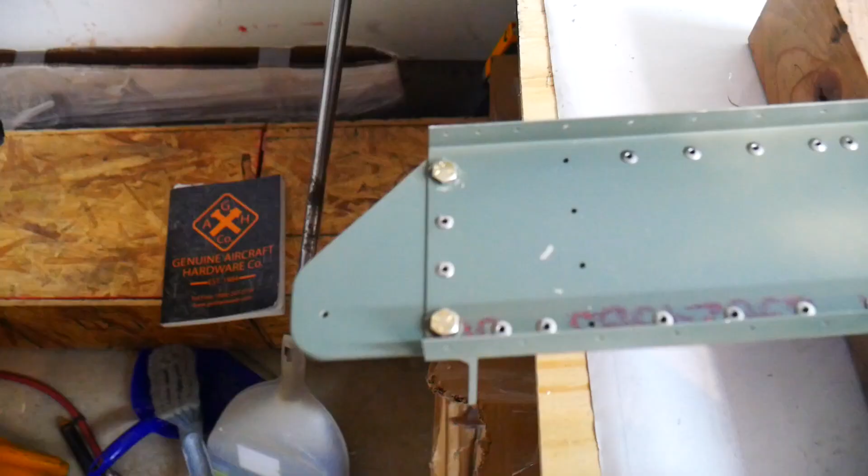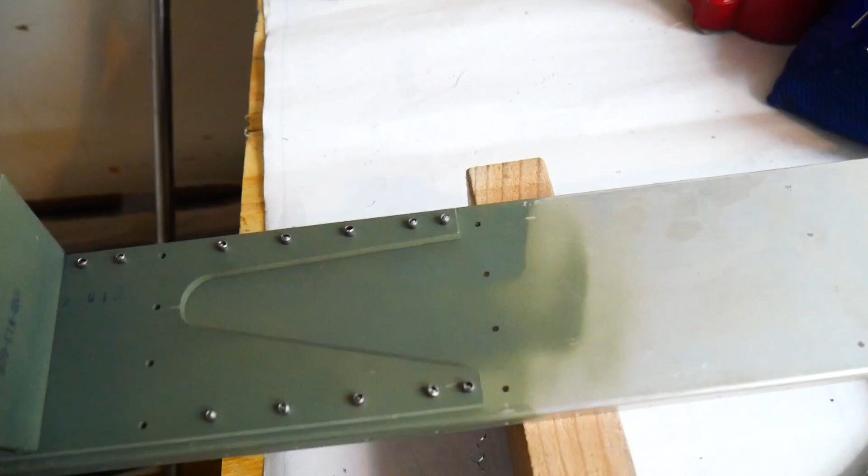I've gone ahead and already built one of these. There's the main spar bar here, a doubler on the back side, and over here another doubler with this little cutout, and then a machined angle bar here.

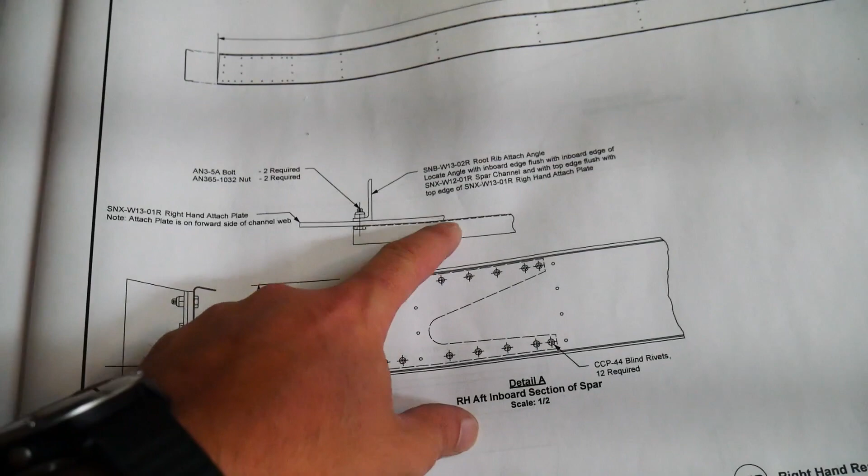You can see we have the plans here for both the left and the right. I built the right one first. There is a slight difference between the two. If you look here at the right one, this attach plate right down here actually goes right on top of the spar, and then it also has this aluminum angle extrusion here.

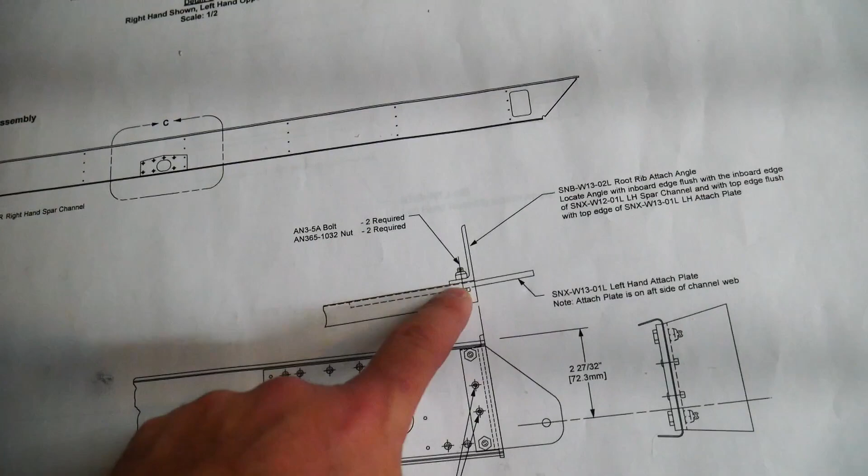It's been machined, and that sits on top of that. But if we look down here on the left side, the attach plate actually goes under, on the inside of the spar, and the angle extrusion actually goes on the outside, and it's also flipped around the opposite direction. So on the end of this one, the flat side of this extrusion lines up with the end here, but up here, here's the end of the extrusion, the end of the spar, and the flat end does not line up with that.

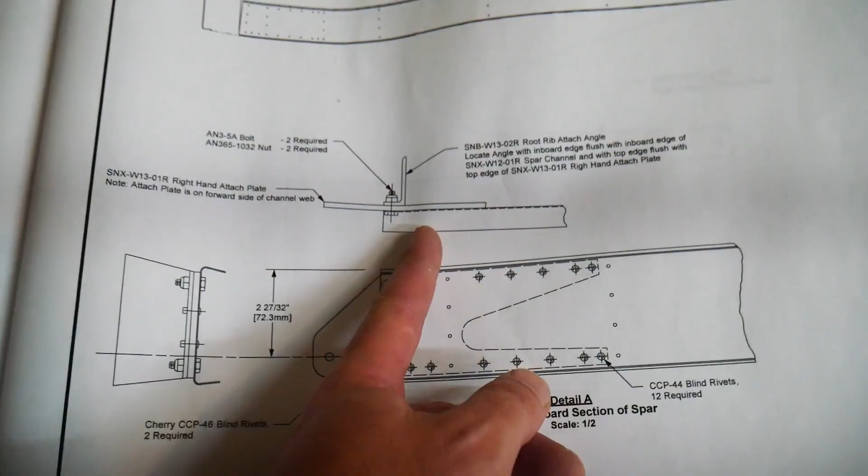There are some very small pilot holes that Sonex has drilled. They're just teeny tiny, you can barely see them. If you're not looking for them, you might miss them.

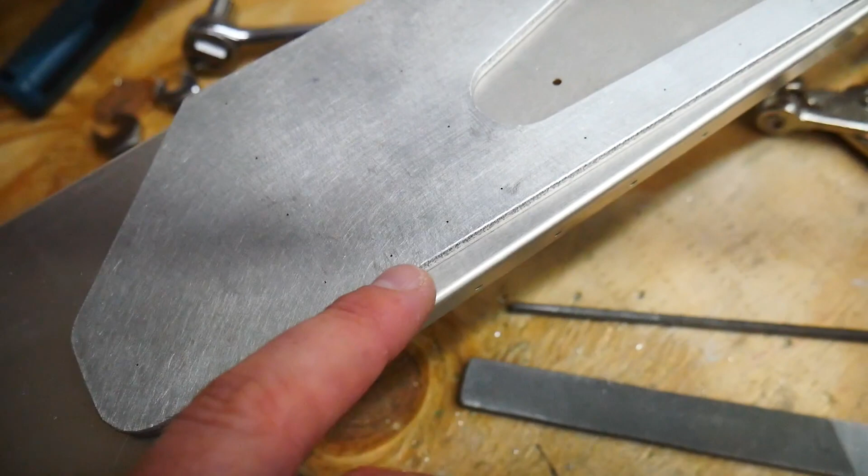I'm going to go ahead and put this on the drill press and drill these up to a size 40 drill bit, which is about a 3/32 inch hole essentially. That'll be just right for putting clecos into place to hold this all together.

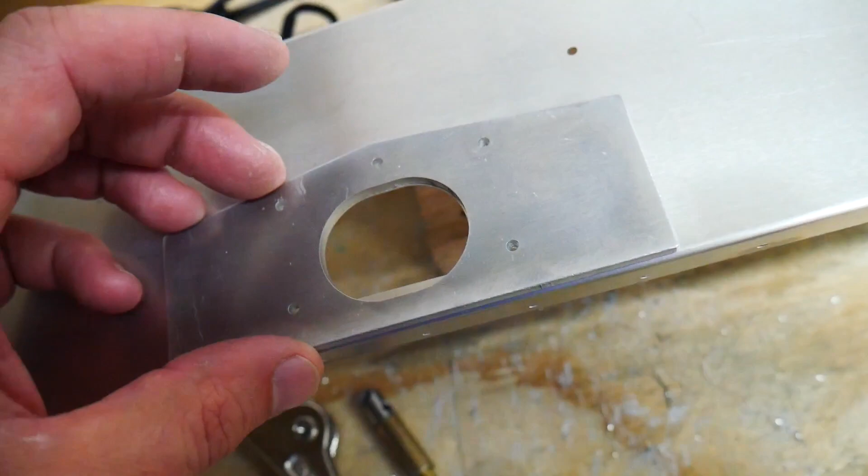Eventually I'm going to be drilling this out. You've got to get this lined up properly, but it'll be lined up and sit on top of this. So these four little holes, if you can see them here, they'll get drilled out, and then this will fit over the top of that, and we'll drill those holes out the rest of the way once we have it all lined up. This one over here basically just sits right over the top of these holes in here, and it just clecos into place, and then it's really simple to hook this one up.

We do have to drill out a couple of additional holes that aren't in the plate, in the doubler plate here.

But anyway, simple. So what I found works well with these attach plates, with these tiny little holes, is just to put it down on the drill press and very lightly introduce the drill bit to it. As long as it's really close, I don't hold this in place very tight. I just let the drill bit kind of center itself over the hole, and I give it the tiniest little tug on it just to make sure that it's lined up perfectly in the center before I drill all the way through. That seemed to work pretty well with the other one.

If I got to the point where I drilled in, I only had like one hole, I think, that didn't drill in perfectly in the center. So what I ended up doing is just flipping it over and drilling it from the other side instead, and it worked fine that way. Just, you gotta be gentle and go slow with it.

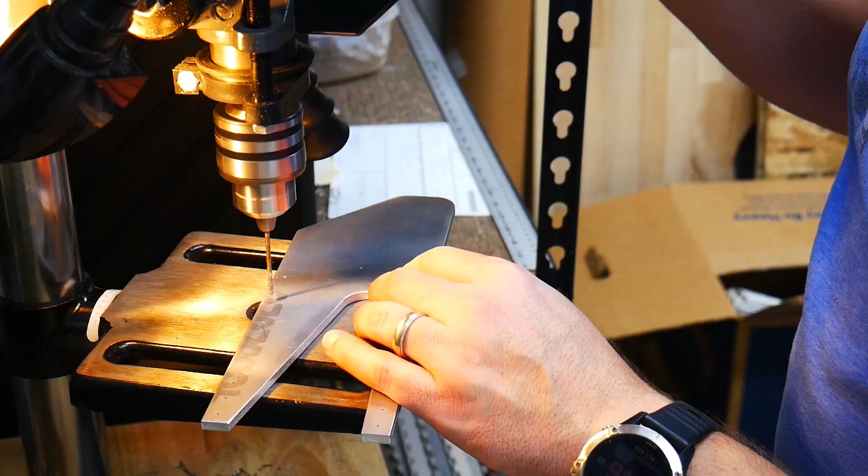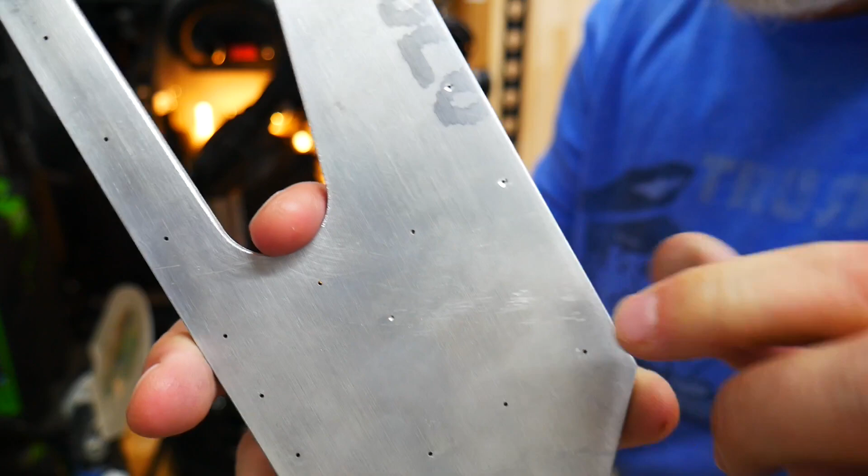Alright, we'll take a closer look here. You can see where this is one where I have not drilled yet, and this is one where I have. It's important to make sure that your hole is drilled exactly in the center, or at least the pilot hole is in the middle of your drilled area here. You basically just have to let it kind of wiggle around a little bit. Don't hold it in place or you're going to end up moving it. If you just let it kind of wander itself around a little bit, it'll find the center and it'll go down, as long as you get the point of the drill bit in there.

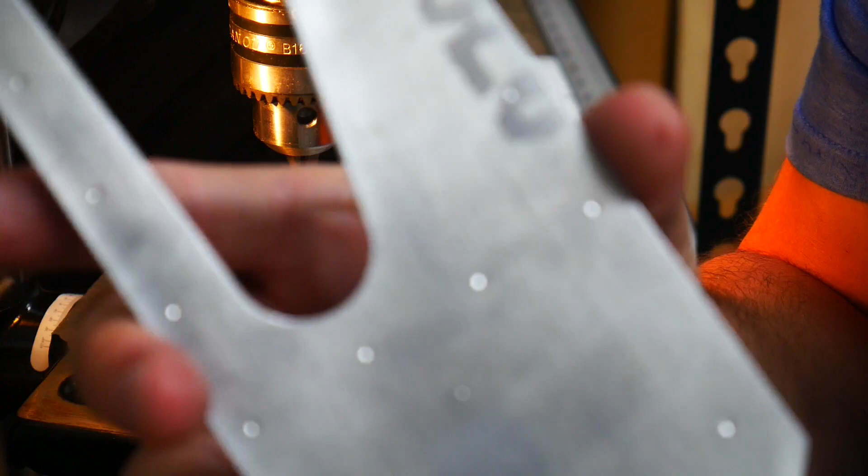Alright, so I've got all of these pilot holes just started, and then I'm just going to go ahead and drill through the rest of the way. You can make sure I use a little bit of cutting oil here, just to make sure that it keeps my drill bit from getting too dull.

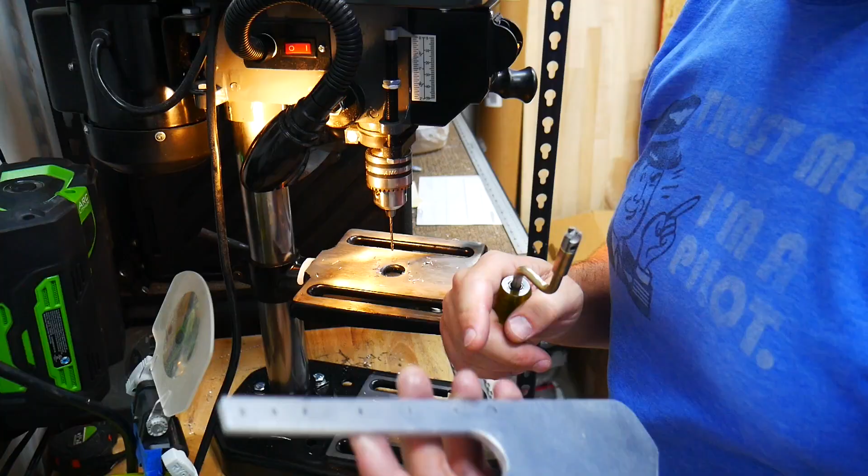Then just to make sure that the plate lays flat on the bed of our drill press here, I'm just going to go through and lightly deburr this. I don't need to take much off, just enough that it sits flat and doesn't make a crooked hole.

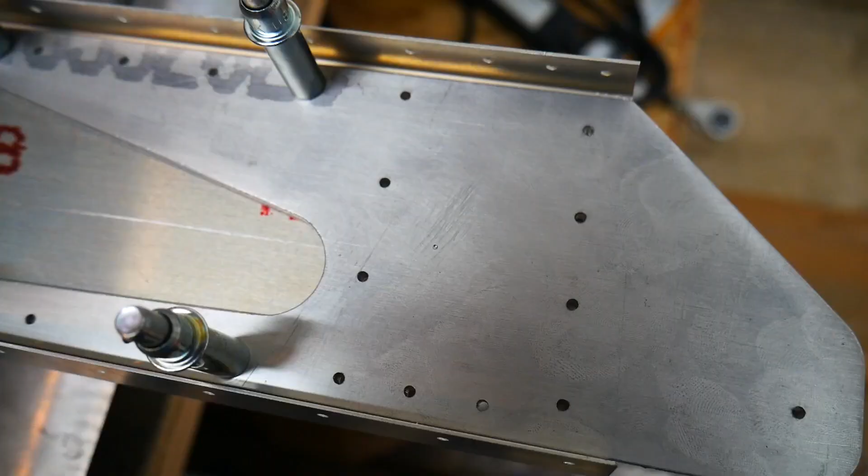So in my opinion, this is one of the most beautiful parts of the Sonex kit. These holes that I've drilled line up so exactly with the pre-drilled holes in the spar here. Every one of them lines up perfectly. It turned out so nice.

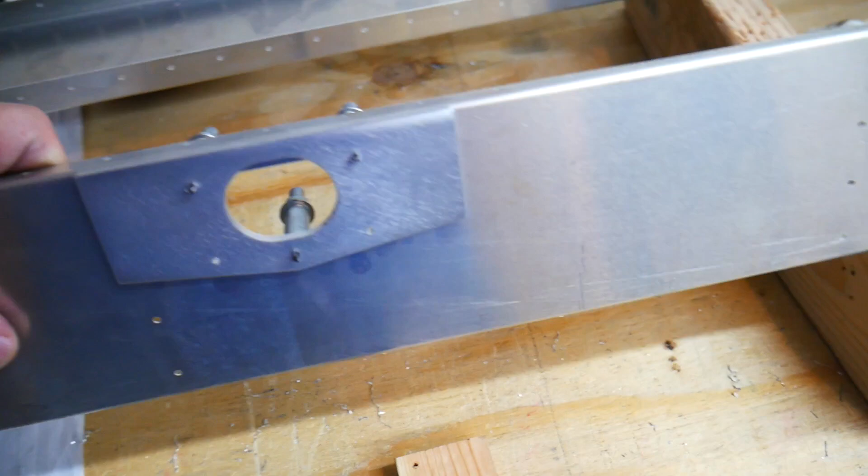I've also added this doubler to the other end of this, to strengthen up this hole here.

You'll notice that there's some holes here that haven't been drilled into the main plate. I'll go ahead and drill those out according to the directions here.

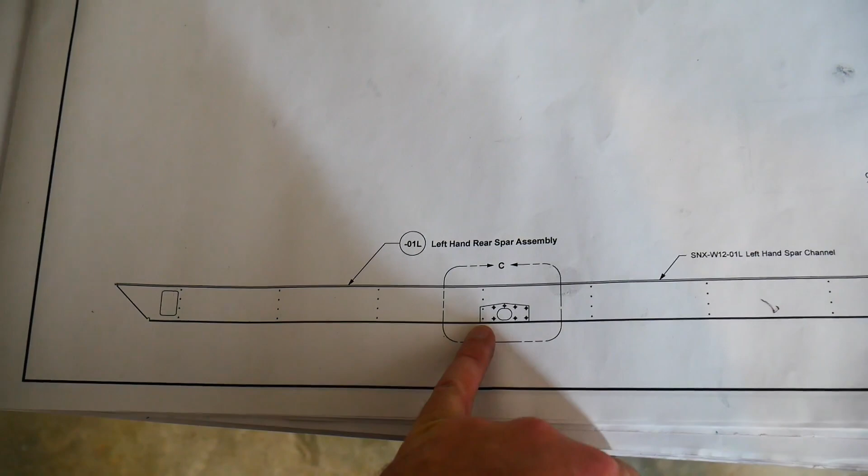You'll notice that there's a couple holes here that are drilled, but we don't put any of the rivets into. It's just these 7 that are right here that get the rivets in them. These 2 don't, but I do drill them out anyway.

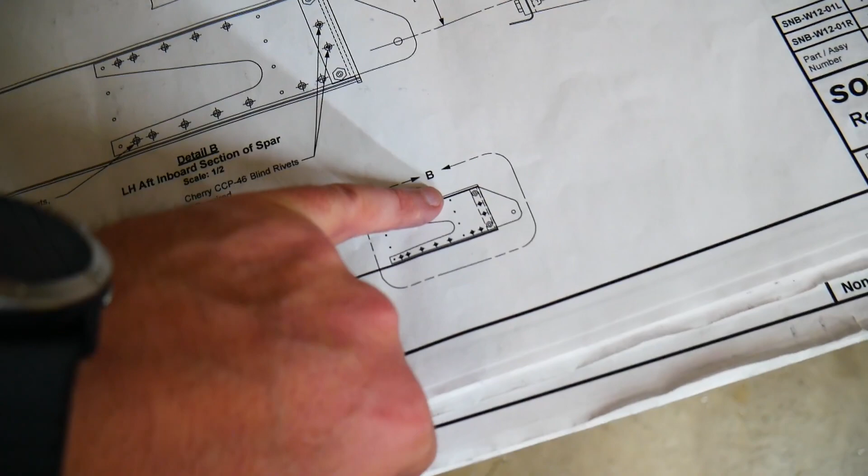Same thing over here. We have several holes that are drilled, but we only put rivets into a few of these holes, so make sure that we don't do the vertical ones here and then these 2 end ones down here.

And then here we put 2 rivets, and these ones are drilled up to an AN3 bolt that we'll put in later on.

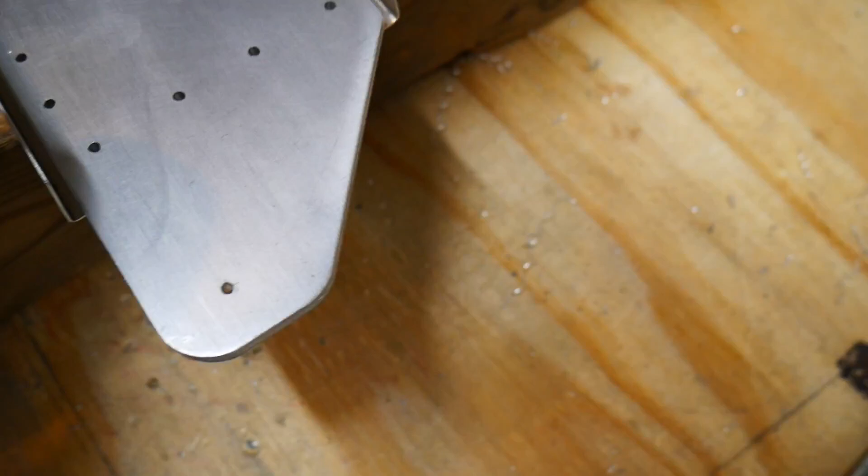Alright, so the next thing I'm going to do is drill out these 4 holes that are right here. They're drilled into the doubler, the thick piece here, but they're not drilled through the actual spar.

And those holes are where we're going to line up this piece of angle, this machined angle extrusion here. It's going to go underneath here and line up right down there.

But before I do that, I'm just going to drill out these holes and make sure that I have them ready to go, so that when I put all this together, it should hold together fairly easily.

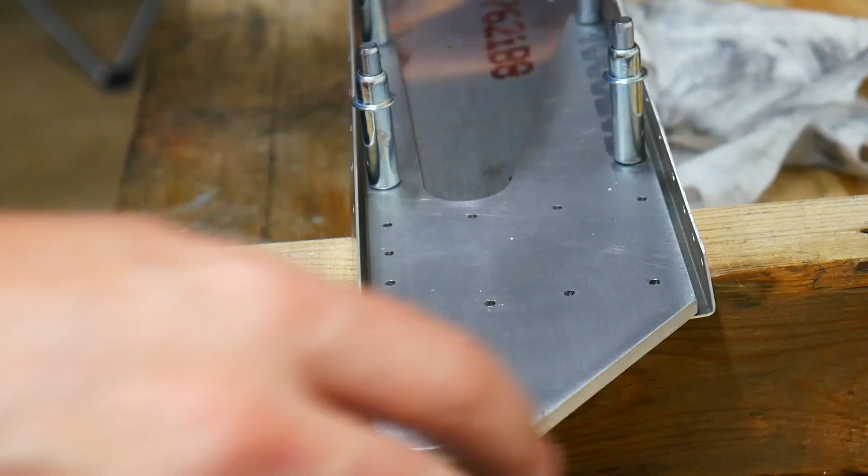Again, I'm just going to deburr this just to make sure that everything lays flat on here the way it should.

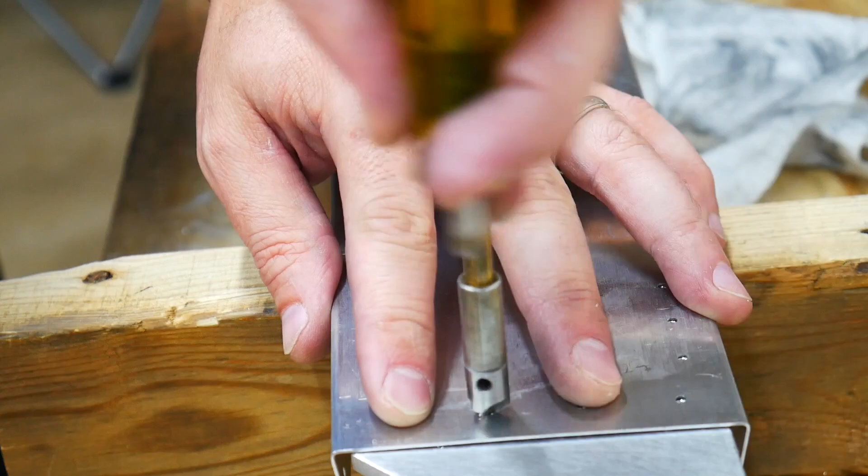So again, this is going to line up with the edge here, this is going to line up with the edge here, and then this flat area here is going to line up with the end of the spar. I'll tell you what, I'm going to mark this with a pen.

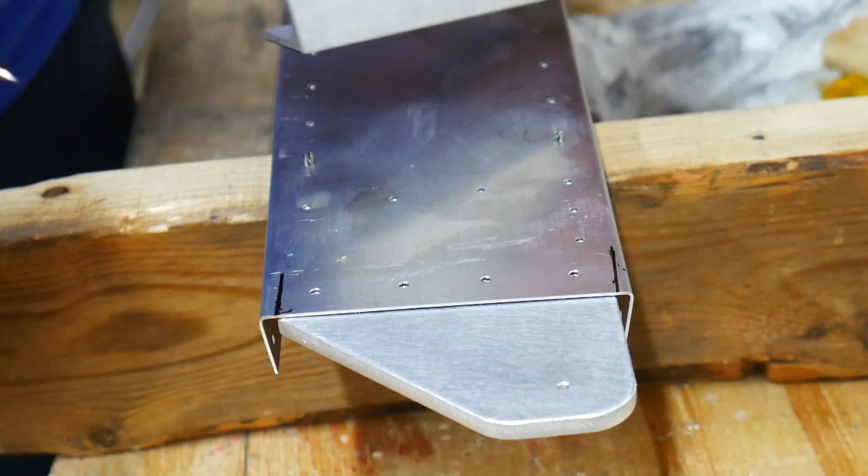So this piece of wood here is going to keep this from moving side to side, so I can just push this up against the back here. And then I've got my lines drawn here on either side of this angle extrusion, right in the center here where I want it.

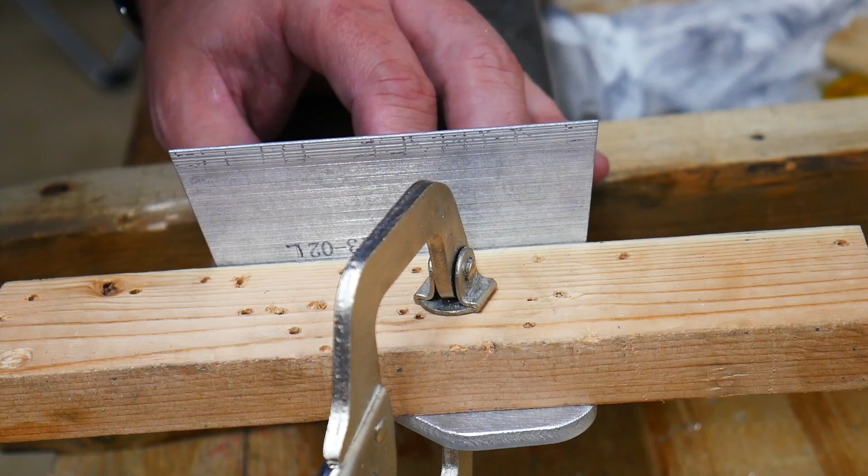Go ahead and grab my other C-clamps here, clamp it into place.

Here's kind of a view of what I've done here. I've got this piece of wood here that gives a nice place for this to butt up against, and it's lined up with the spar down inside of here.

And then I've drawn a couple of lines right down inside of here and over here to line up this angle with. And then I will simply flip this over and drill holes right through this part, and have to be extremely careful to make sure that I don't move that at all while I'm drilling.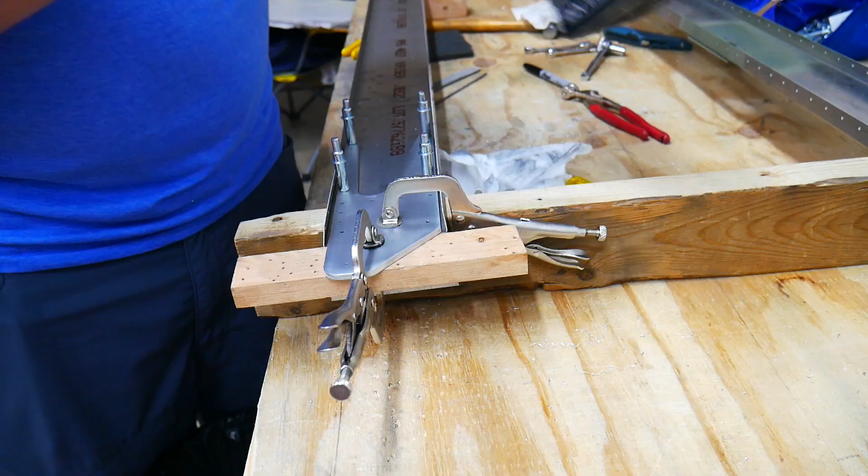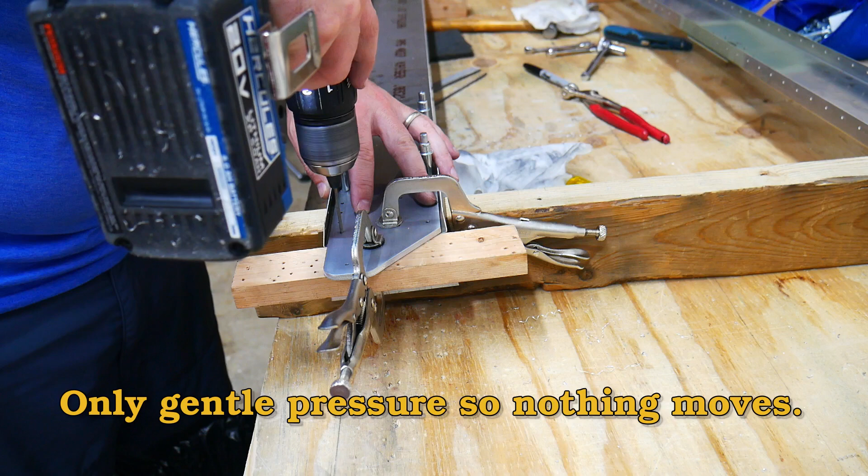Just going to quickly flip this and see that I'm not moving at all. Looks like it's pretty well centered still.

Alright, I've got one hole through and it looks like it hasn't moved at all, so I'm just going to go ahead and put a cleco in there and hold it in place.

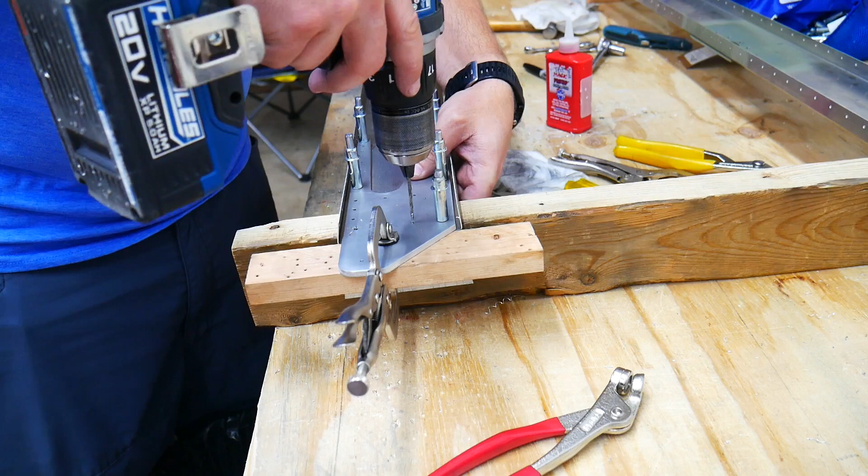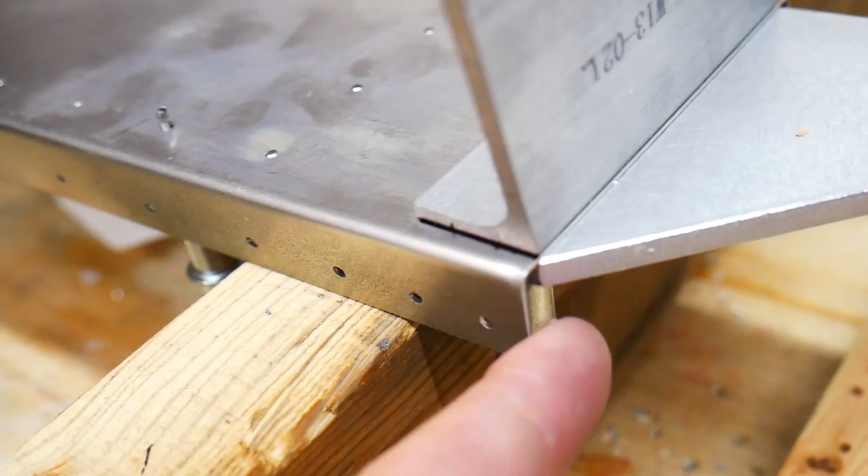So you can see how nicely it's lined up here with the edge of the spar. It's also lined up just right here on the edge on either side, pretty much as perfect as that gets. I've got all 4 holes drilled at this point. 2 of them are going to be for rivets in the middle, and 2 on the outside here are going to be for bolts to hold it all together.

We have several holes here that need to be drilled the rest of the way through. 4 of them actually, I guess not several. We've already gotten the other ones drilled through.

Probably good to just stress right now, I'm holding from underneath to make sure I'm not putting too much pressure onto this bottom plate here that's only being held in by clecos right now. So I'm actually holding it from the bottom. I could just as easily stack it on top of this piece of wood when I press down on it, but I just want to make sure I clear the wood when I drill through. So I'm holding it from underneath in a spot where I'm not going to drill my finger.

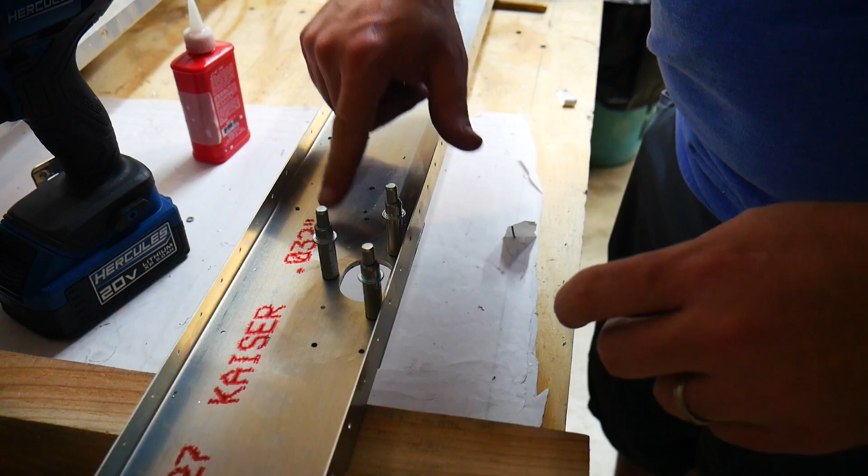Alright, got all of our holes drilled up to the 3/32 with our number 40 drill bit. Now we're going to move on to the number 30, and a couple of these holes, not all of them, just a few of them.

So the easiest way to realize which one of these you want to drill out and which ones you don't - pull this off the tripod here. The side that has this beveled end on it, that's the side that we don't drill these 2 holes for. Leave those, eventually there's going to be a rib that goes right into here, so we're going to leave those right at the 3/32. The rest of these will all be drilled up to 1/8 inch though.

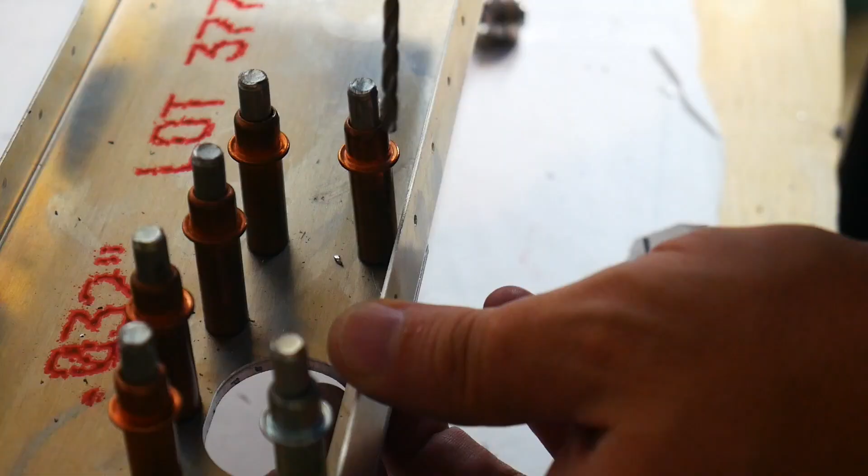Alright, so I've put clecos into holes that I don't want to drill, just to make it easier to remember which ones I want to drill and which ones I don't. So these two on the very end, they're going to be part of a rib, so I don't want to drill those out yet. I want to drill those up bigger once I have the rib in place. All of these right here, they will be drilled up. These ones, again, for another rib, they're not going to be drilled up. These two will be, and then I will drill up these ones in a minute, but I'm going to take care of the rest of these first, and then get to that one in a minute.

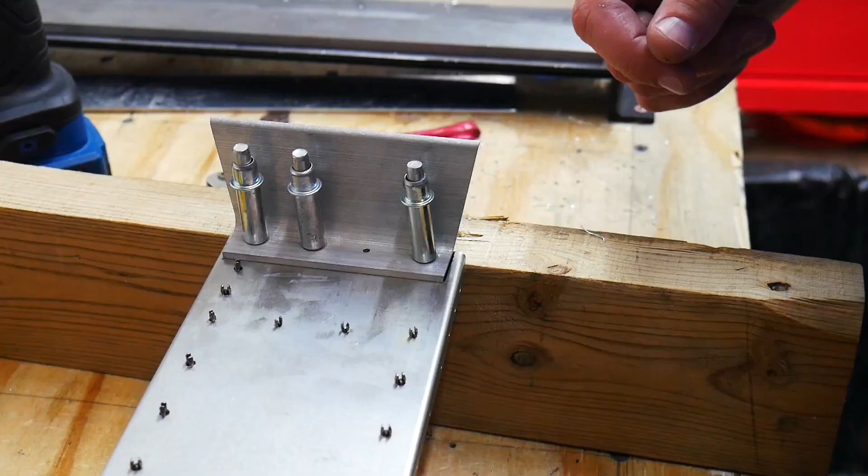Alright, now just going to go ahead and up drill these holes right here. I'm going to go ahead and go up to 1/8 inch on that, even though in the end these are going to be 3/16 on the end. I'll just put a bigger drill bit in, but I want to make sure that these are centered at 1/8 inch first, and then we'll upsize them.

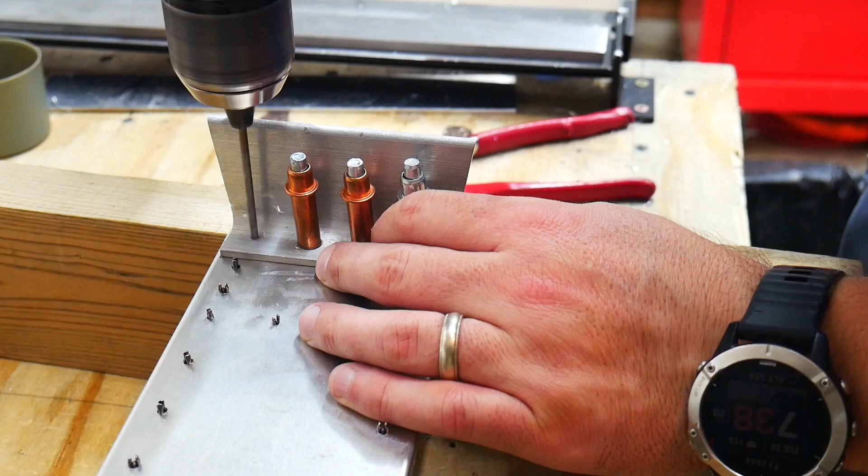Alright, looks like everything's drilled in there the way it should be. Time to disassemble this and deburr it before giving it a nice little paint spritz, and then putting in my rivets.

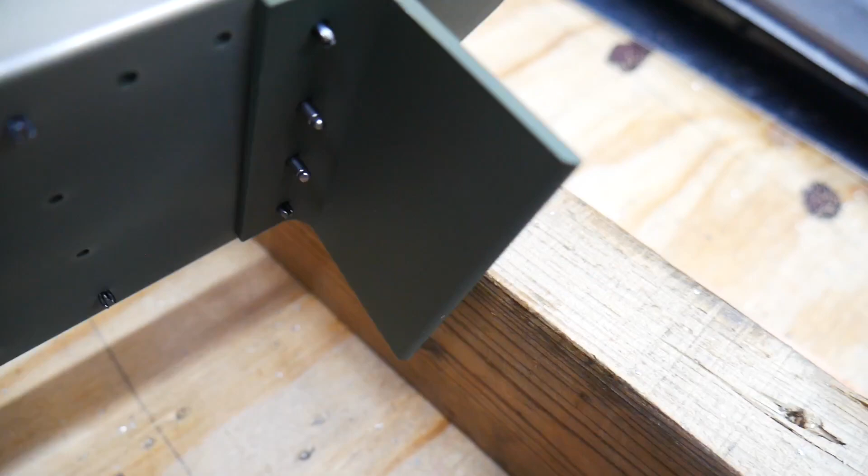Alright, so all of these holes here require CCP 44s except for these two, because we're going through an extra little chunk of metal here. We need some slightly longer ones. So these ones take CCP 46s, which are slightly longer. So those ones will go right down in here. And you can see they poke out just a bit more here on the other side. If I were to try and put a CCP 44 in there, it wouldn't quite reach or be long enough.

Alright, these are all CCP 44s.

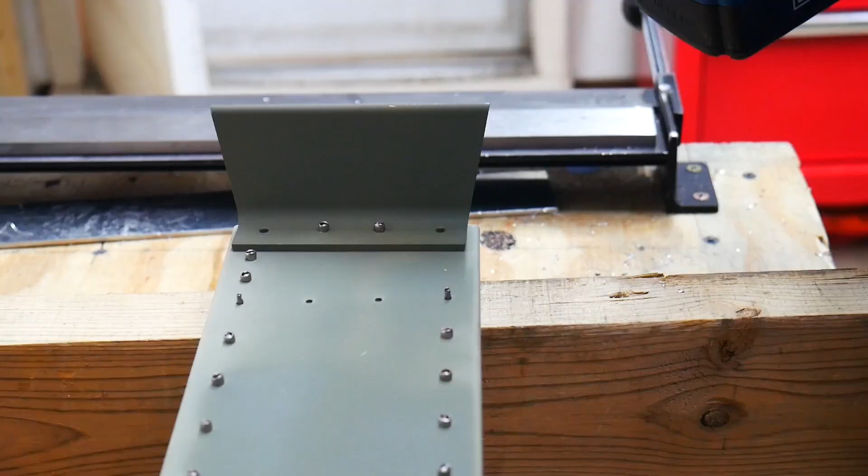Alright, time to move up to a 3/16 inch drill bit to make the hole for the AN3 bolts that need to go in here.